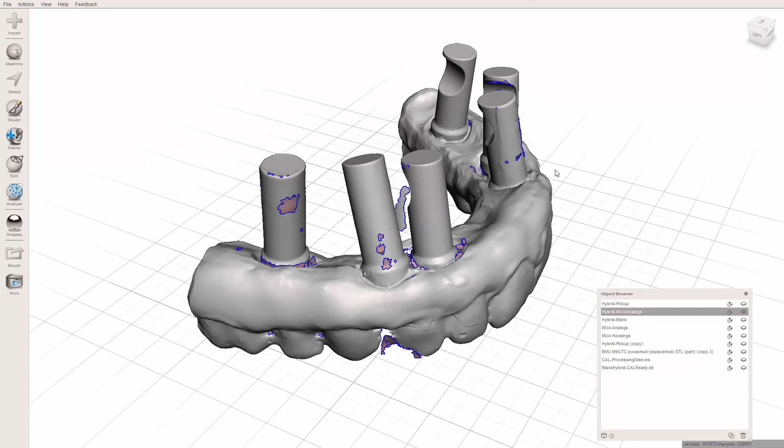Okay, so I've actually already finished creating this video on this technique, but I want to make a quick intro edit, because this whole set of two videos I'm making right now really are assuming we've got a hybrid that's already in the mouth, and now we've got to basically take an analog impression, or we've picked up our implants in the hybrid, and so then we've attached analogs and scanned that with these analogs sticking out.

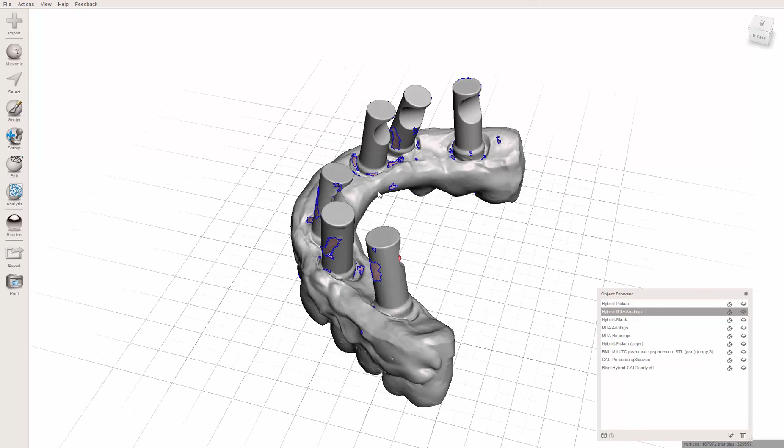But here's the thing, you might not always have that. You might not have a temp denture that you've done a pickup on. What if you're just uncovering this patient for the first time, and all you've got is some impressions of the patient ready to make a denture, or your hybrid, whatever it is, and you know you've got an edentulous arch.

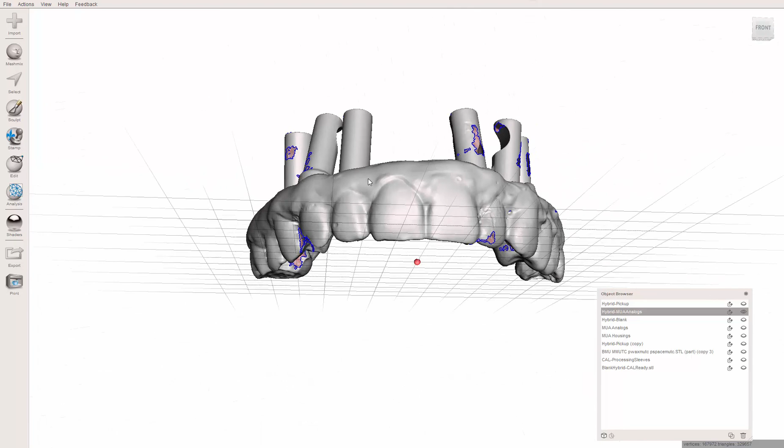But you also have to find out where these housings are. So in your same impression, you could think of this hybrid here. Just forget the fact that there's teeth and just assume this was actually just the impression. You have some other way of determining the VDO, the occlusion. You've already done that as part of your denture setup, but this right here is just an impression.

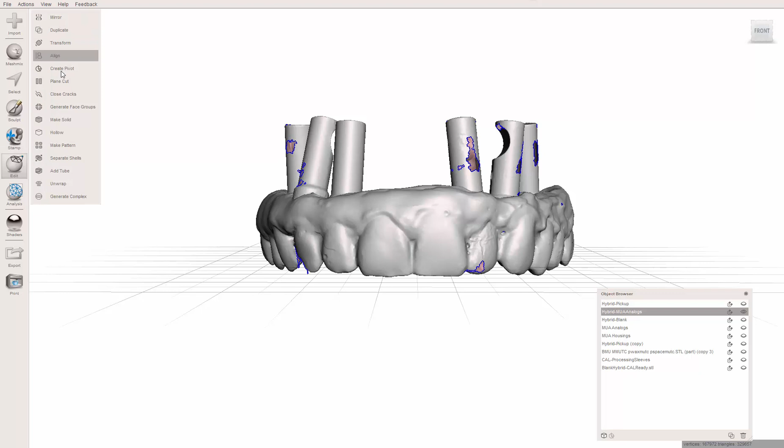So everything I show you in this video, it really doesn't matter that this part has teeth on it. It could just as easily be - let me try something - plane cut. This whole object could be cut just like that and have no teeth on it, no record. I'm not going to do it because it won't clean that up, it'll look ugly, it'll be dumb.

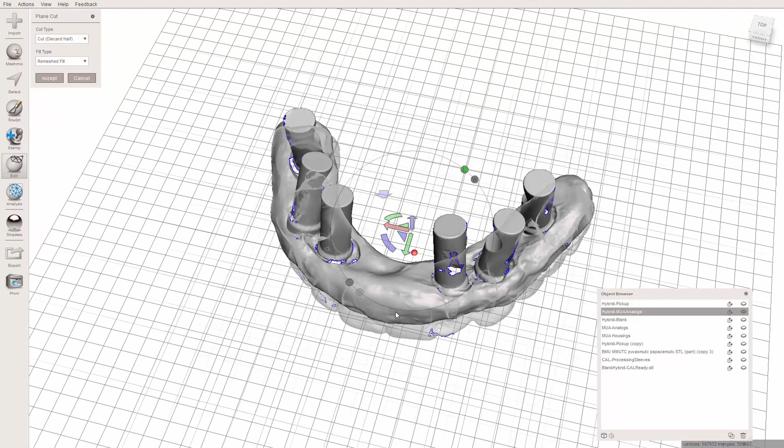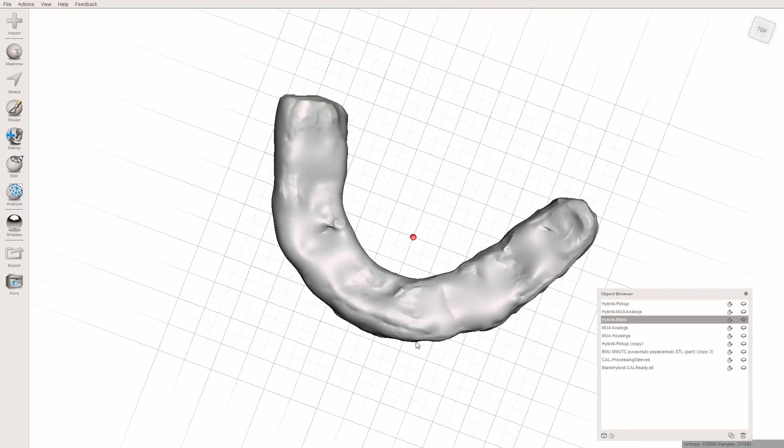But I think hopefully you get the point that the teeth do not play any role in this. They don't contribute at all to what we're doing here. The only thing I need is where these are, the bottom of this potentially, but really for this thing I just need these six pieces, these analogs sticking out, and then having this blank hybrid that I've created elsewhere, in some other software, whatever. As long as the two of them are lined up, that's why the tissue portion is important, just like any impression - really just the intaglio, the tissue portion, and the analog sticking out is the only thing that's important from this.

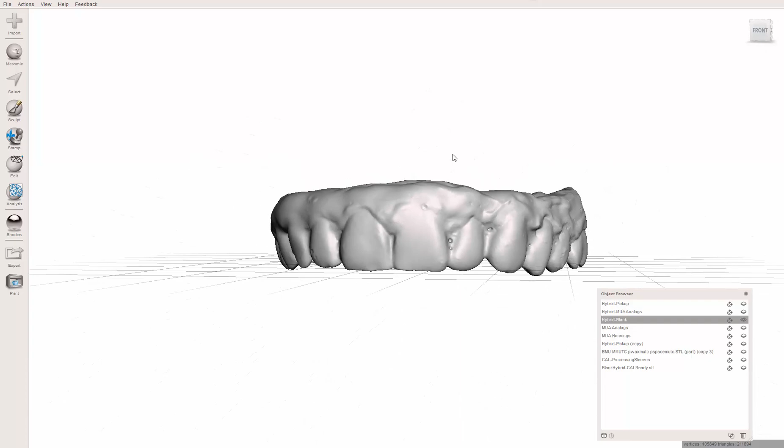So I can create my hybrid right here, we'll say in Blue Sky Plan, and then do the rest of what's shown in this video to make it so that it's got holes in it. So I'm going to stop there. I'm going to let the rest of the video explain that process so that the holes are precisely placed, and hopefully this introduction helps to provide a little more clarity to the subject. All right, thanks so much.

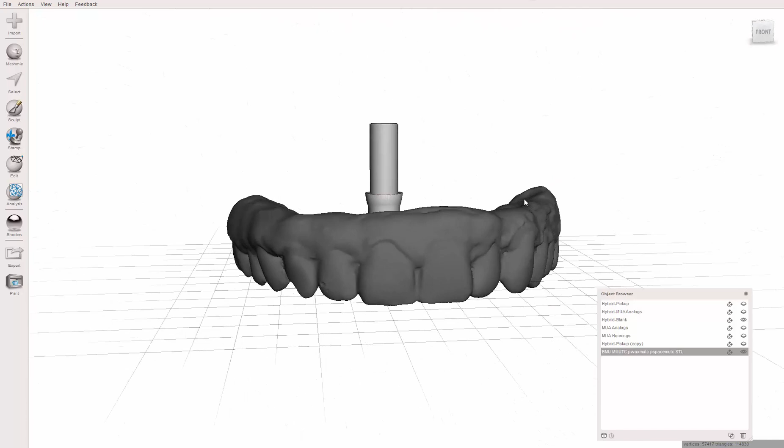Okay, so in this video I'm going to show you how to take this generic sort of denture thing that we've created here, and how we can digitally remove the holes that would be where our implants are, so that we can do what we call the Cal technique. So anyway, I've already done it in a previous video, with these analogs and then these more traditional housings, which you can still do with this approach.

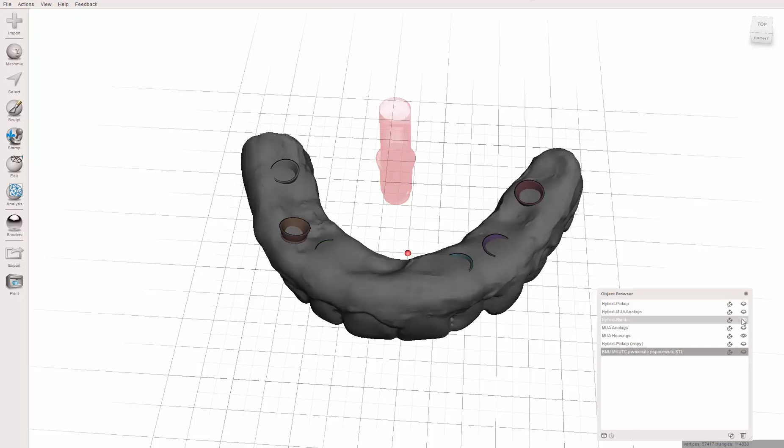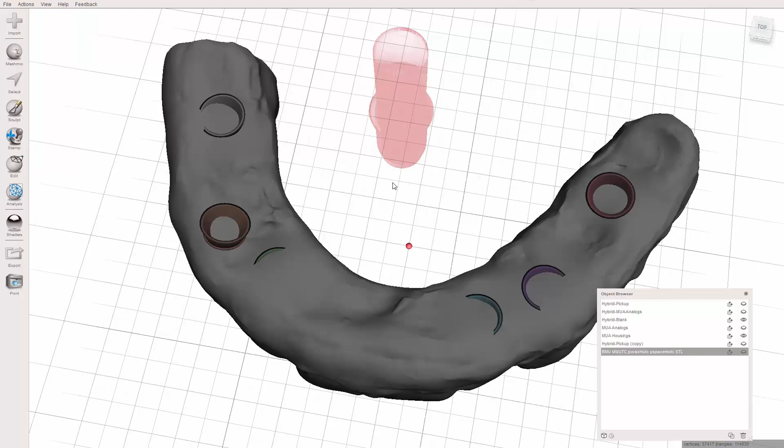But if you were to do a Boolean subtraction of these from it, they're going to be ribbed holes like this, so you're not able to slide anything in and out. Plus, there's no offset, so it wouldn't really work if you combined it and made those holes perfectly within this - your alignment has to be perfect. So the Cal technique gives us some wiggle room so that we can get a passive fit.

So anyway, let me show you how I would approach it if that was my goal. So let's hide these. First thing I'm going to do, I want to focus on how I would modify this object. So right now, in this current workflow, this outer shell would be basically built into your framework, or metal framework, or whatever.

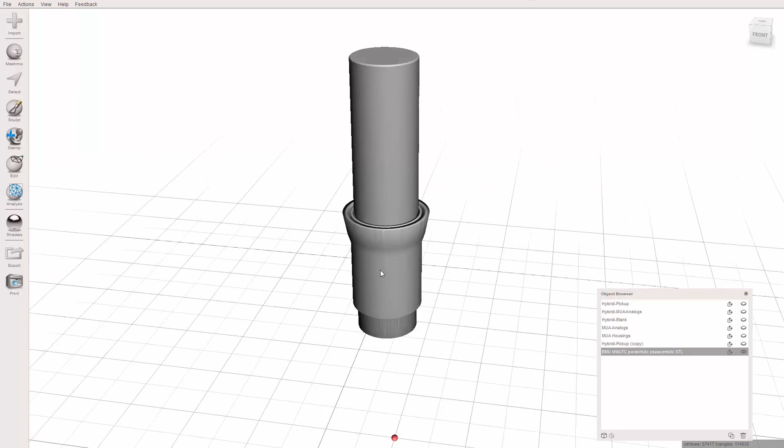Inside there's this little processing sleeve that just basically takes up space, and inside of that there's the actual same little Christmas tree looking housing. So effectively what I want is to make this outer shell part of my actual design, so I don't even need to worry about it.

What I'm going to do here is use the select button to double click on it, and I'm going to delete it. Don't need that, not at all.

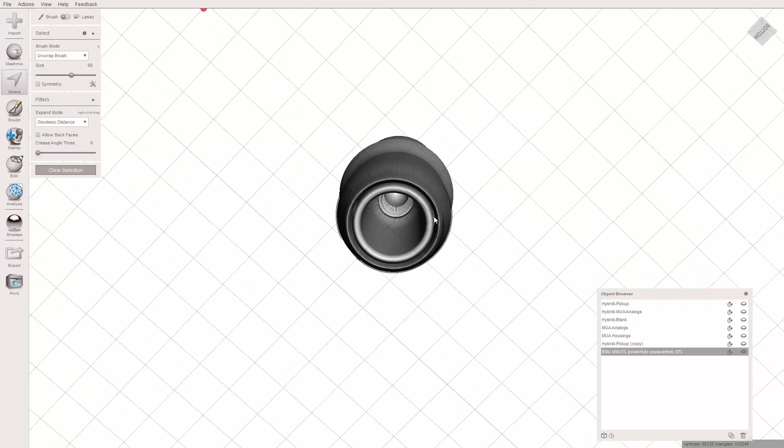So now I'm going to do something a little different here. I'm going to come right on top of this. It's a little bit going to be hard to see what I'm doing here. I'm going to make my selection tool a bit smaller so you can focus in on what I'm doing. I'm going to click right on the rim of this right here.

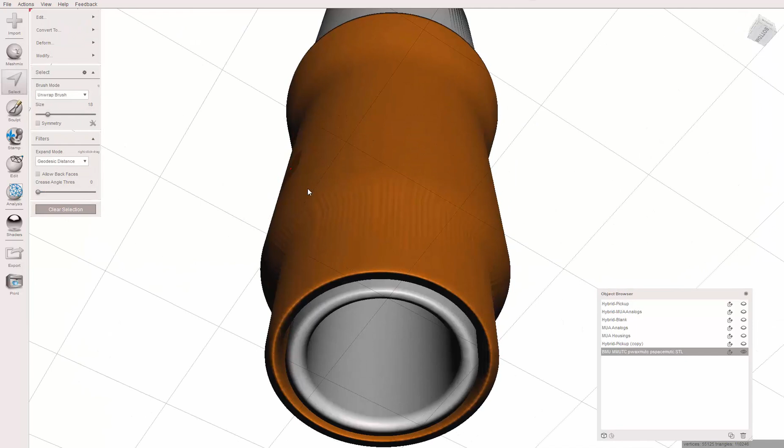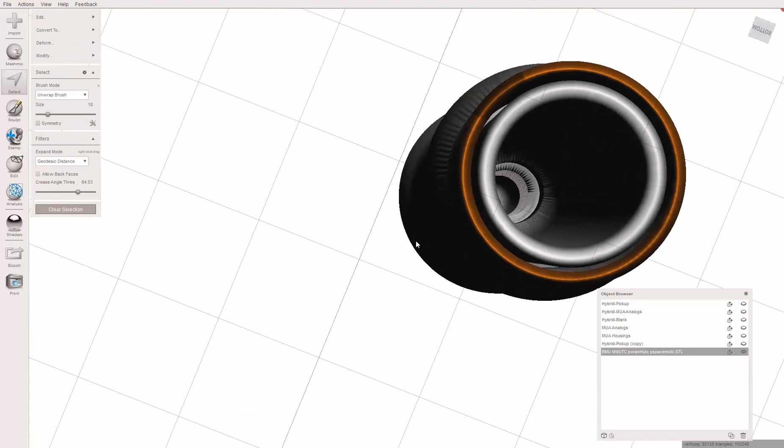I didn't mean to double click the whole thing. I am going to change the crease angle to be really thick, and trace right around. All I'm doing with the crease angle is making it so if my selection tool falls off at more than such an angle, it won't select, which means the inside and the outside aren't getting selected at all.

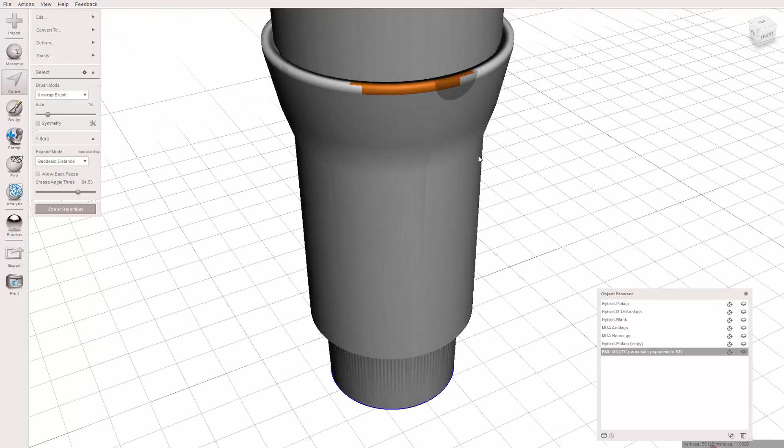So now you might wonder why I even bother doing that. Well, here's why. I'm going to hit the delete button, and do that one more time right up here. This wasn't actually part of my plan, but I think I'm going to go ahead and do that. A little bit tricky here.

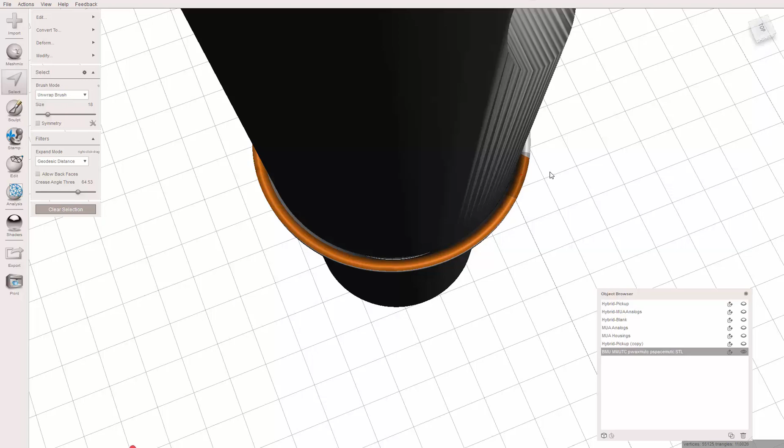All this work I'm doing right here will hopefully be automatically done within the Blue Sky Plan software for us. But if you think you're going to do this multiple times and want to have this on your own, do it one time, save the file, and you won't have to mess with this again. It'll be pre-completed for you. I know what I'm doing looks tedious, and I'm certainly not going to do it six times per case. One time ever, no big deal.

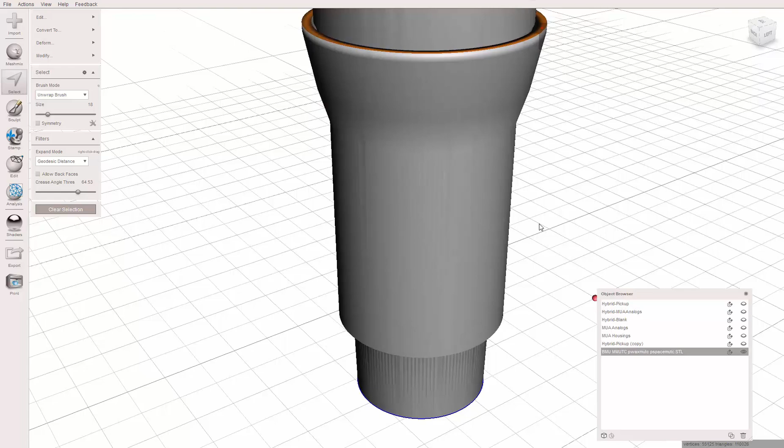Now hit delete. Now you see how there's this shell inside here. Oops. I'm going to highlight on that, double click, and delete.

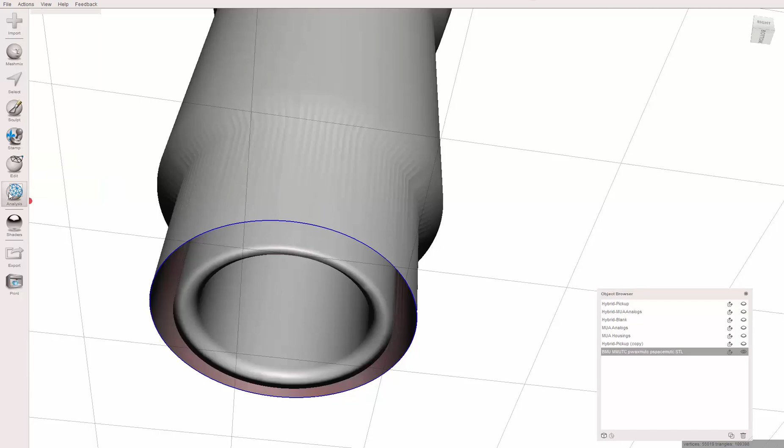So now I'm going to come up here to Analyze, Inspector, and there's a couple holes in this object. Oops, lost myself for a second there.

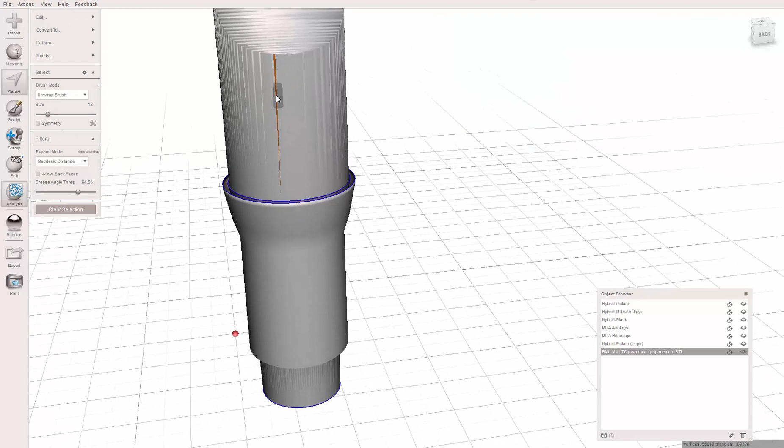Oh, it didn't delete everything. All right, so I'm going to go ahead and double click that, double click this, hit Y to separate those. I could have just done that in the beginning. Get rid of that.

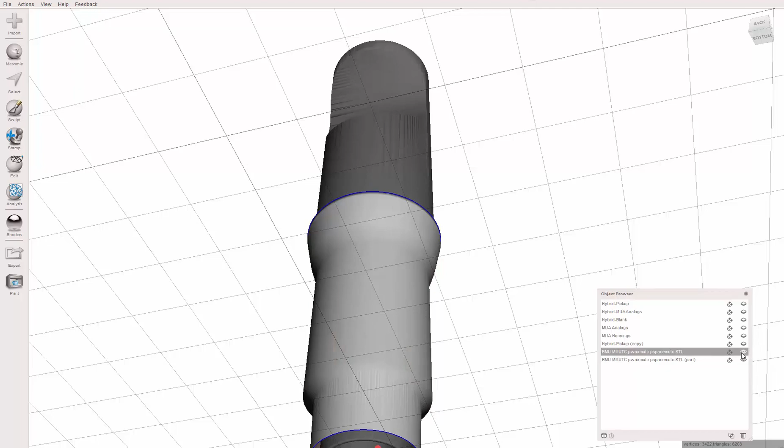So if you see what I've just left, I still have what I've previously used here. I just subtracted it from everything, so now all I've got is this housing. And I don't want anything on the inside here. Delete that.

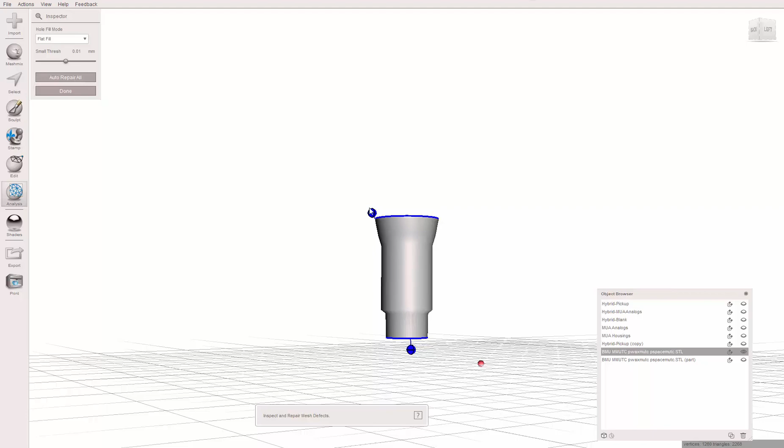Now everything's gone. Okay, so now what I can do is come and close this end off, and close this end off. And so this thing is going to travel anywhere this analog goes. This is going to travel with it. This is going to create my space.

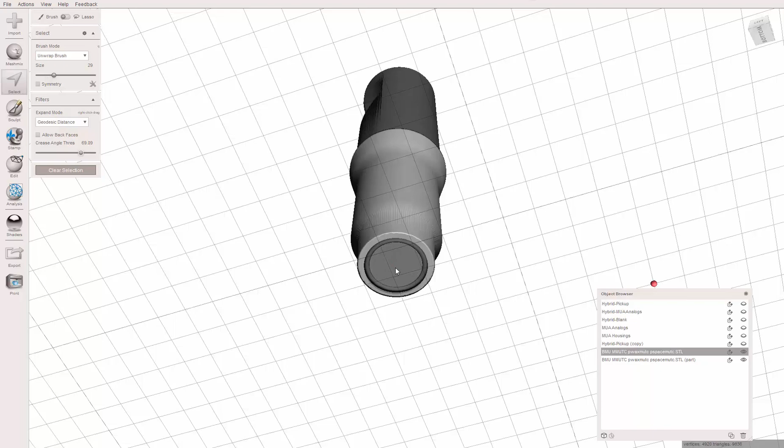Now here's one last thing I'm going to do. I'm going to go to the select tool. My crease angle is nice and high. I'm going to make this really big and select with only just one click, because now it selects everything on top here. I didn't click on this other thing - this is a separate object.

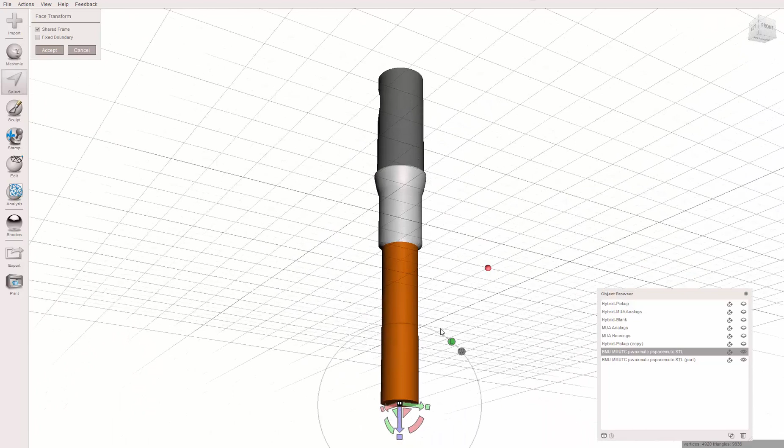And I'm going to click Transform, the T button, and just pull this way down, because this is going to make sure I have a screw hole to access these. Hit accept. Okay, so now here is my new analog hole thing.

Let's go ahead and reconnect these two things, combine them into one STL. And so now I can go about what I did in my previous video of aligning these, okay?

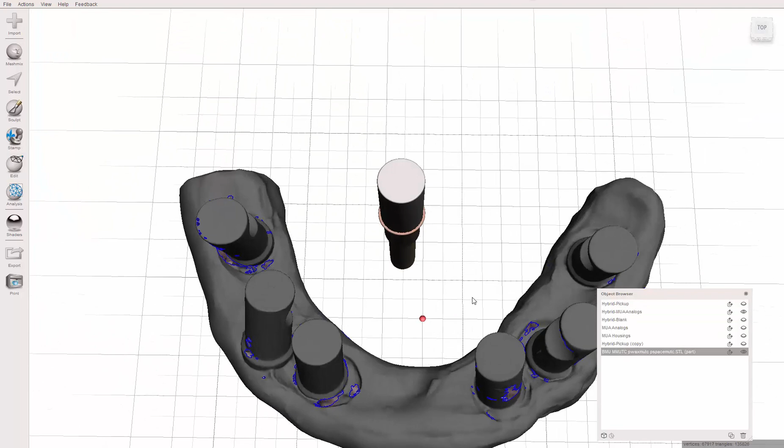So I'm going to go ahead, do one, and then pause the video and do the rest on my own. I'm going to press the N button, scribble a circle. Oops, I fell off the edge there. Do not do that. N.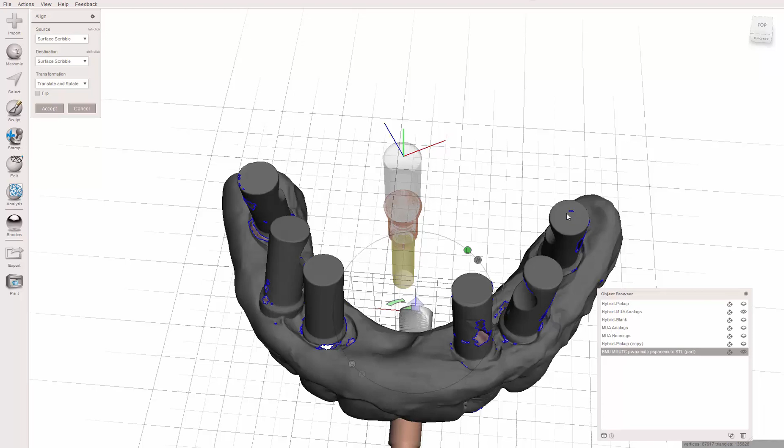Draw a circle, hold the Shift button, draw a circle. Flip it over, and line it up as close as you can. Doesn't have to be perfect - that's what the whole Cal technique is going to allow us to do. Hit accept. Okay, and I'm going to pause the video.

Alright, I have now finished. They are all lined up.

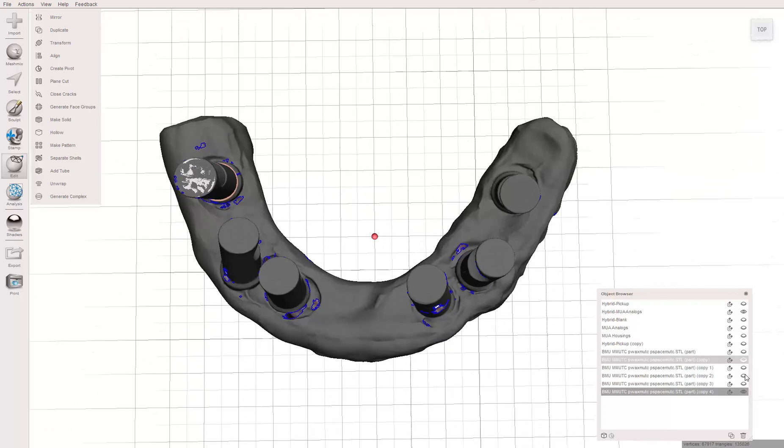Let's hide this, and you can see here they all are. Okay, so now we can go ahead and combine them all, because we don't want them to move, so there's no reason in having them separated. Click combine.

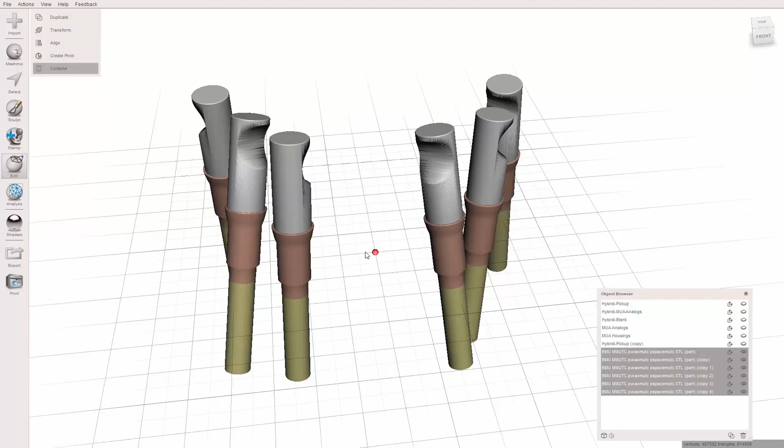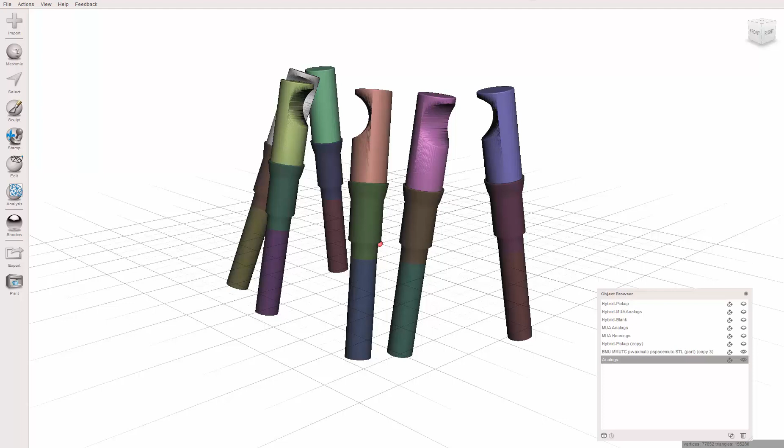And now we can go ahead and select, select, select. Hit Y. And so now we've got analog - I've got the same one up here, which is pretty much the same thing, but that's fine from my previous video. And so here's these housings.

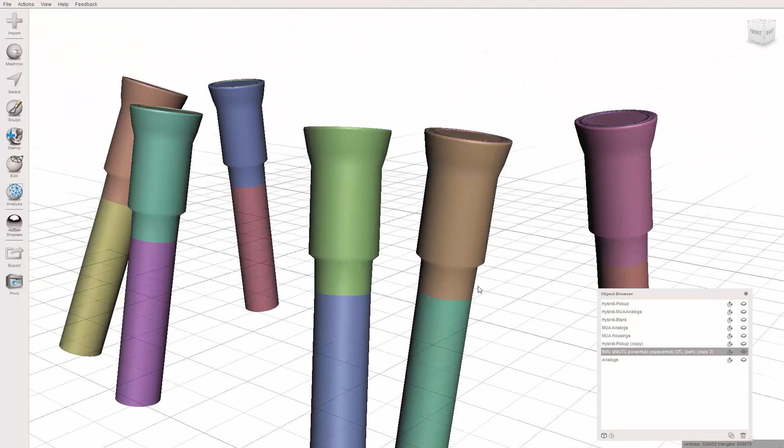Now, one thing I didn't do, I should have done, but I'm going to show you how to fix it anyways. You know what I'm going to do here? I'm going to undo that because the problem is I still have the actual housing contained within this. Not a big deal, but I really don't want those in there. So I'm going to hit Control Z, and now they're no longer disconnected.

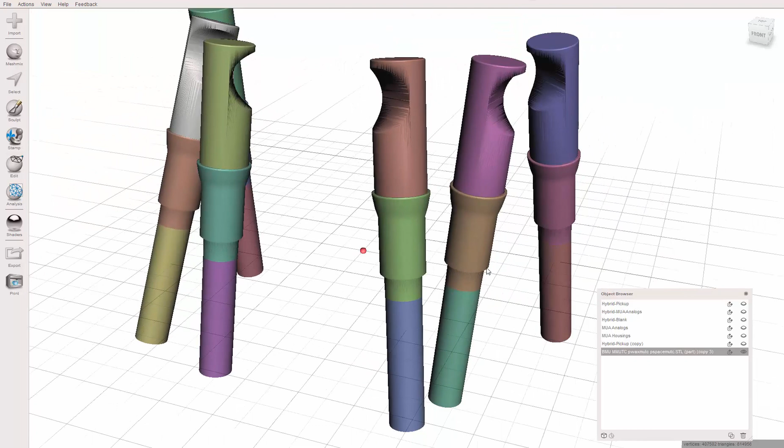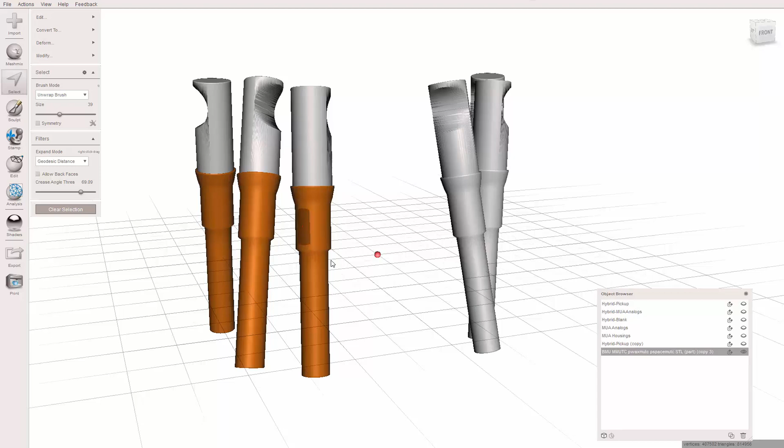I'm going to hit Control A because all these colors are going to make things a little hard for me. Control Shift G, and so now the colors are all gone. Why is this important? Well, because I can now select this part, because technically there's three components here. Here's the analog and housing inside of it, and then this outer processing sleeve that we created, or that was there but we modified, the spacer portion.

Okay, so I'm going to hit Y to separate those out instead. And now hide. And so now I've got these. So if you're, let's go ahead and, yeah. So, cal processing sleeves.

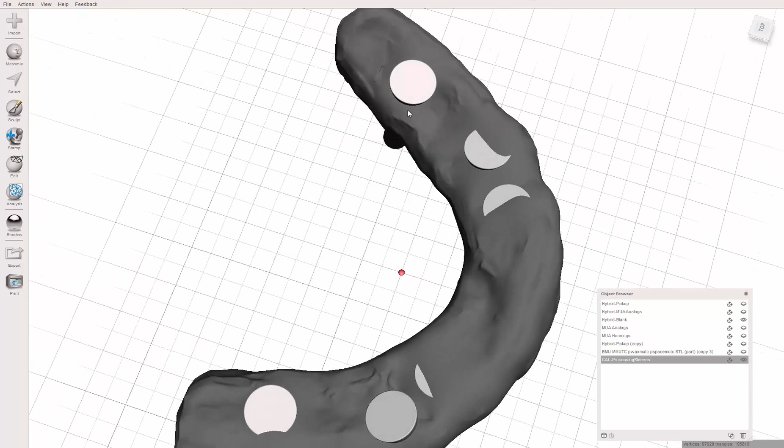So here's what I should have done. My oops - I should have extruded the bottom portion as well. Because when I turn on this blank hybrid, they don't perfectly stick out, which means my holes aren't quite all the way through. I could just Boolean subtract it and then take my hand piece and cut it out, whatever. But it would be best if I went ahead and took care of that to begin with. So I apologize, I'm going to show you how I would do that.

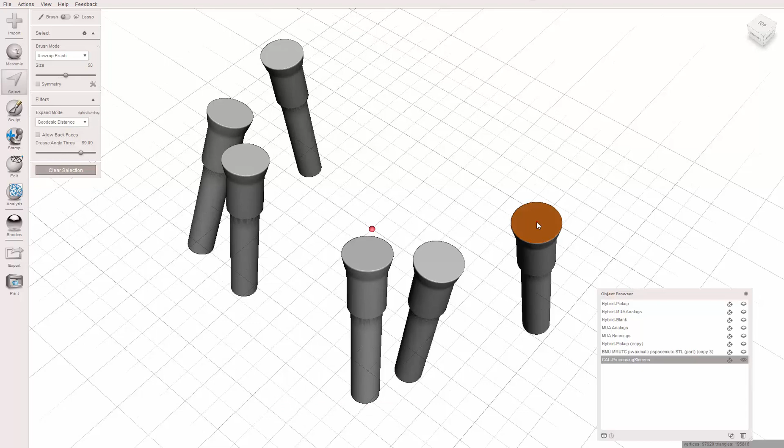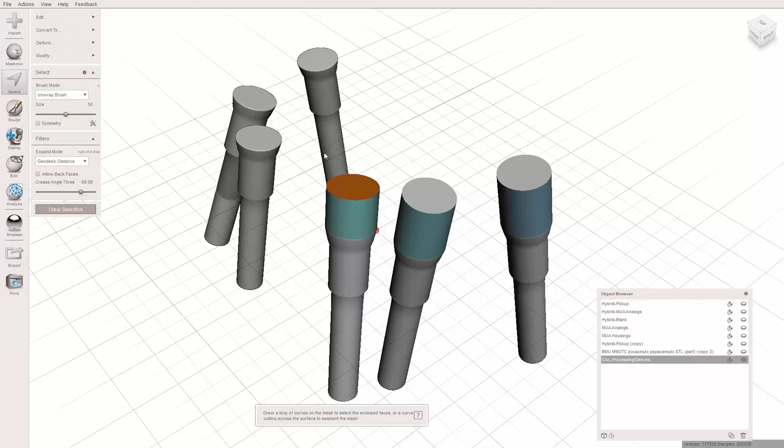I'm going to turn - my crease angle is already up. Select here, T. You have to do this one at a time, because if you try to do all of them at the same time, the distance at which the transform moves will be an average of all 6 of them. Hopefully that makes sense. And it doesn't take long to just do them real quick.

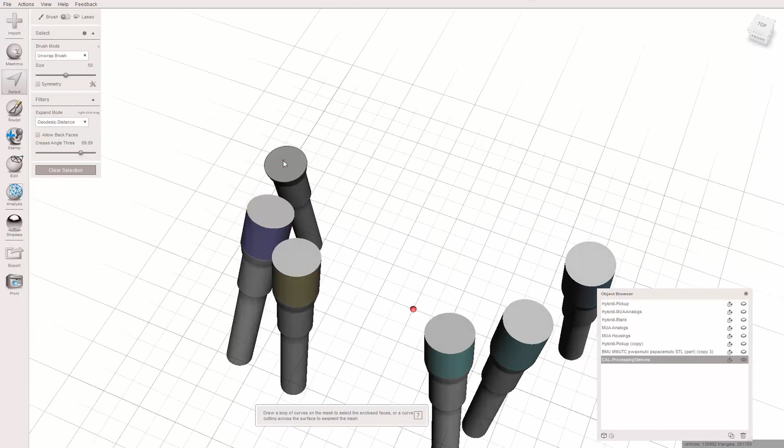But, like I said, had I done this at the beginning, it would have been faster. Could I re-record this video? I certainly could. Am I going to? No. This is me just thinking out loud and kind of showing you my thought process. If this is useful to you, awesome. If it's not, well, hopefully it was at least entertaining.

Probably not. Okay, so now these are nice and extruded. I can bring in my hybrid blank, and so now I could do a Boolean subtraction, and I'm going to end up with holes that I can drop my sleeves right into. So I'm going to pause for just a second. Okay, sorry, I had to check on something.

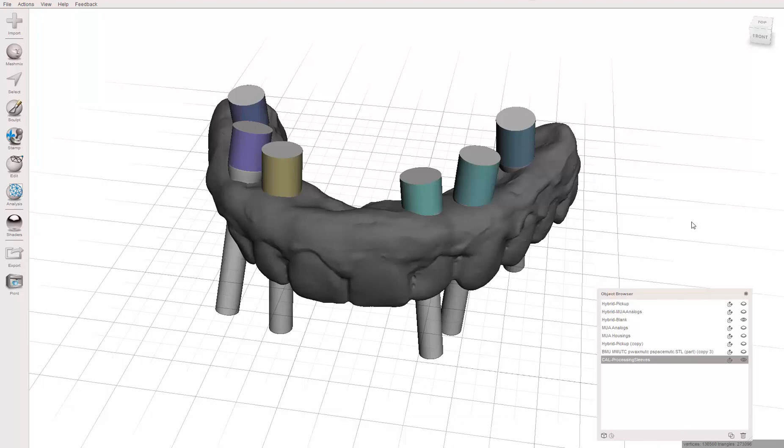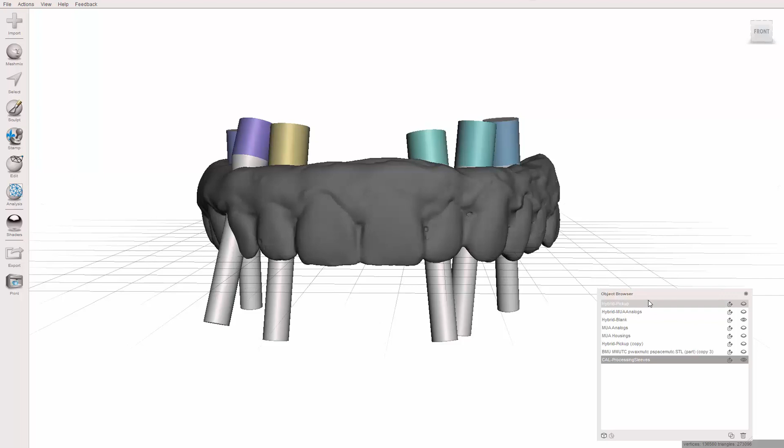Now, here's one of the tricks that I've started using more and more, and the Boolean subtraction you can do in Meshmixer, but those of us that have tried know that it can be really frustrating, and it can take a while. So anymore, this amount of calculation I probably wouldn't do in Meshmixer. Instead, I would come over here and I would extract each of these, or export both of these, and open them up in 3D Builder. So I will go ahead and export them, and then I'll pick up in just a minute. And I'm going to pause for now.

Basically I just created a folder so I wouldn't have to mess with hiding anything. So I'm going to export, we're going to say the blank denture. You may already have the file saved somewhere, but if you've moved it at all in Meshmixer, make sure you resave it. If not, don't worry. But I'm going to pretend I have.

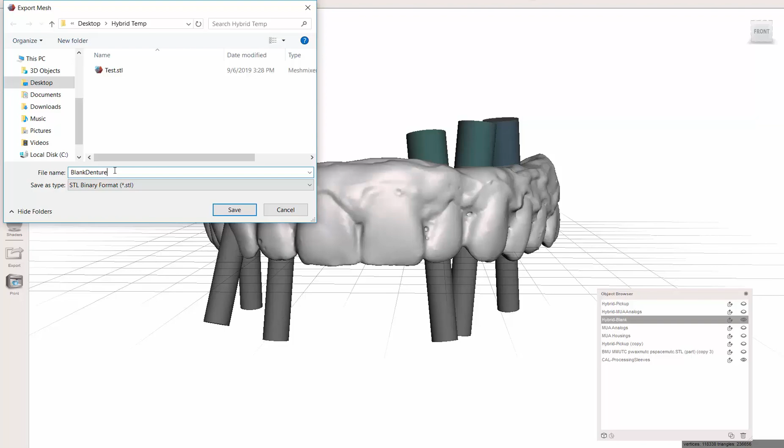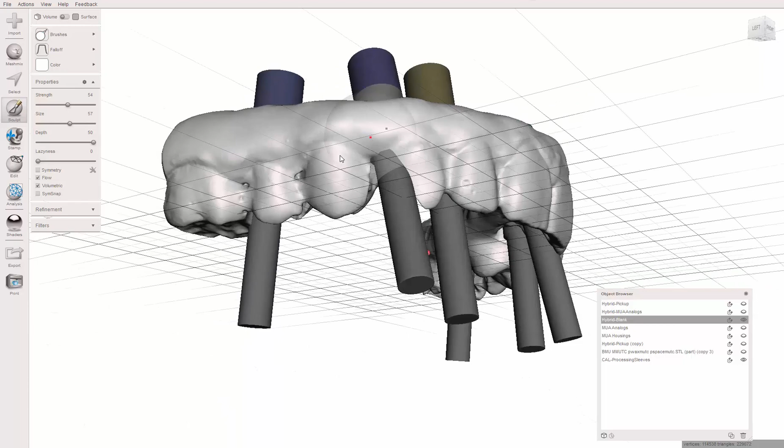Before I do that, notice that in here you could be looking and think, oh boy, this looks like it's going to be super thin right here. You might notice that and think, okay, I want to reinforce that. So I'm going to come to Sculpt, grab my brushes, grab the drag, make this area really big with the bracket buttons, and sort of drag it out and thicken it up a little bit. I'm not saying you have to do that, but it's an opportunity to modify your design if you think it was well designed but honestly not going to be strong enough. Let's go ahead and bring it out here.

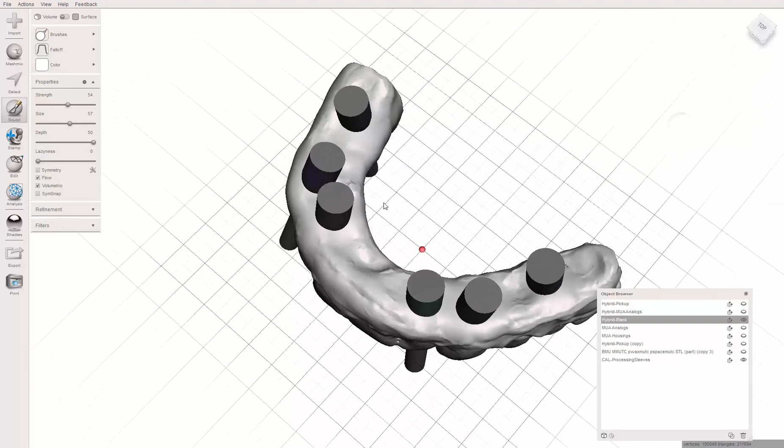Now, this is all assuming this already fits. You can do the Boolean subtraction from the model as well if it didn't fit, but honestly, if you designed it in Blue Sky Plan or whatnot, it's already meant to fit the tissue. We just need to make it fit the housings. So that's it, just a little bit of adjustment there.

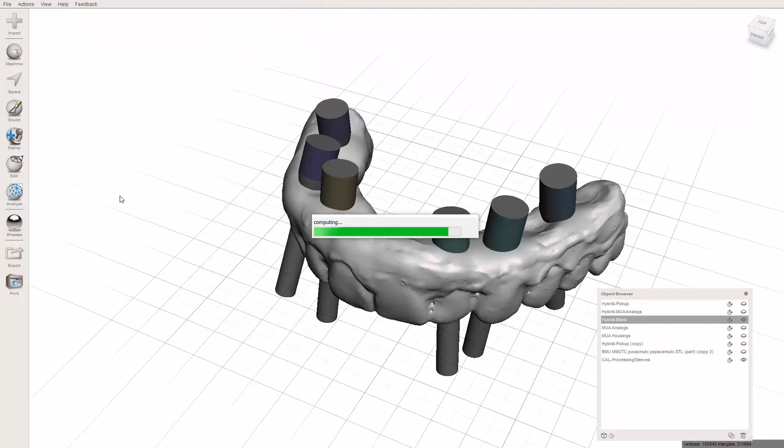Now I'm going to export. I'm going to call this the blank hybrid. And call this the cal cylinders.

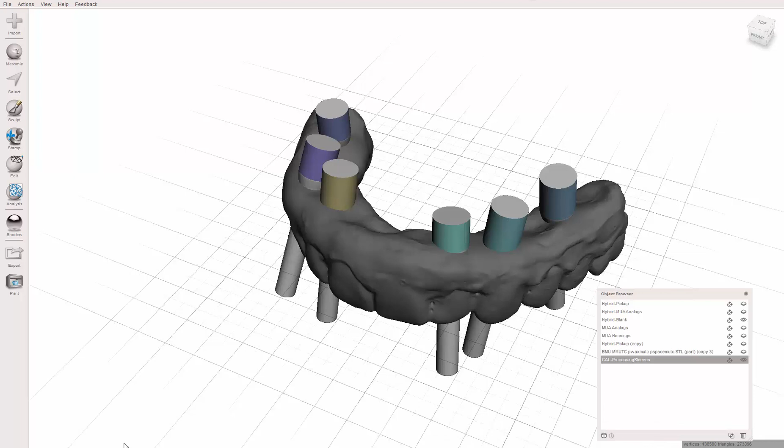Just a second, I'm going to pause and unpause. So I've got this folder right here. I'm going to open up 3D Builder and ask for just a new scene.

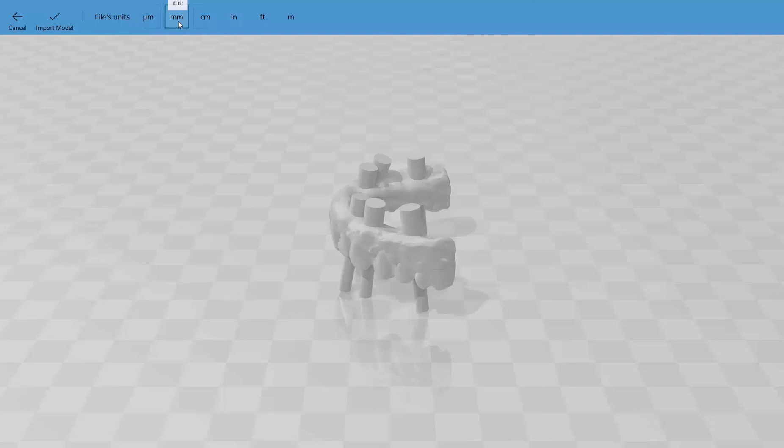Now I'm going to take both of these objects. You have to do them both at the same time. I'm going to drag and drop them, and it will load them. We need to tell them what units - make sure you process this properly, otherwise it will screw you up later. So we're in millimeters, that's everything we've done so far is in millimeters. It's in dentistry, it's going to be millimeters. And click Import Models.

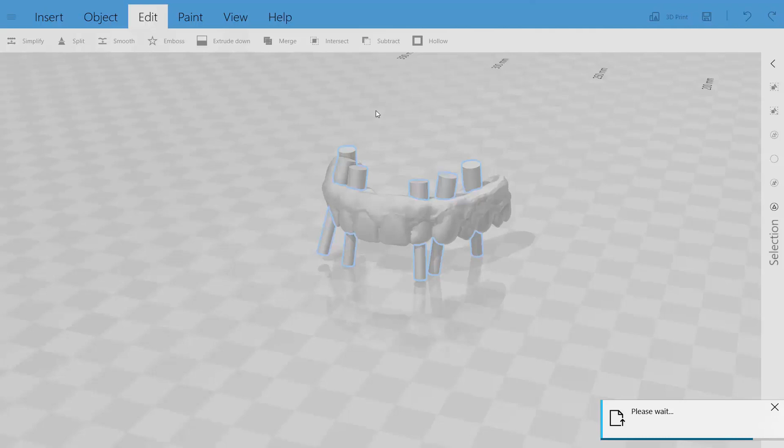Now all we have to do is click on these, just these. You notice if they're highlighted, but the denture itself is not highlighted, just the outline of these, and we're going to click Subtract. And there you have it - you now have your Boolean subtracted object.

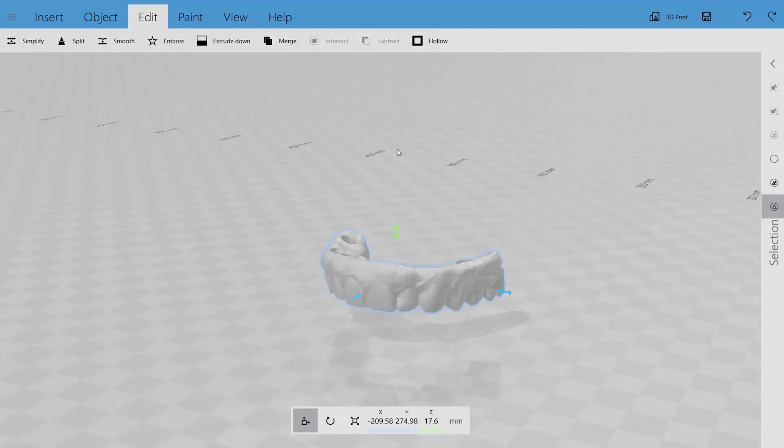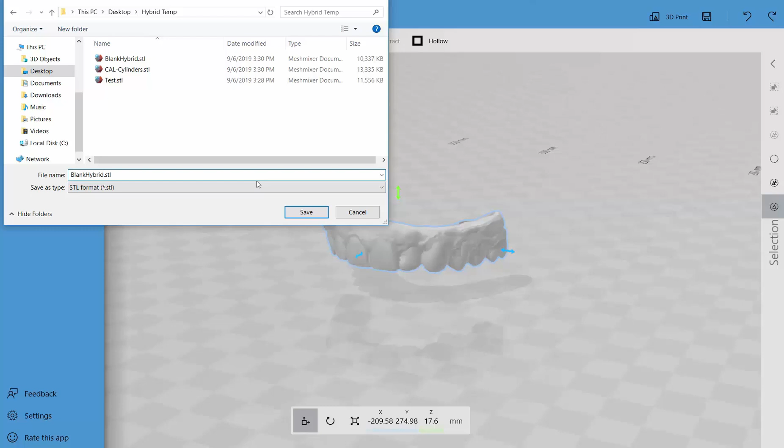Now we can come here, hit Save As, make sure that we have STL file format, call it BlankHybrid, and hit save.

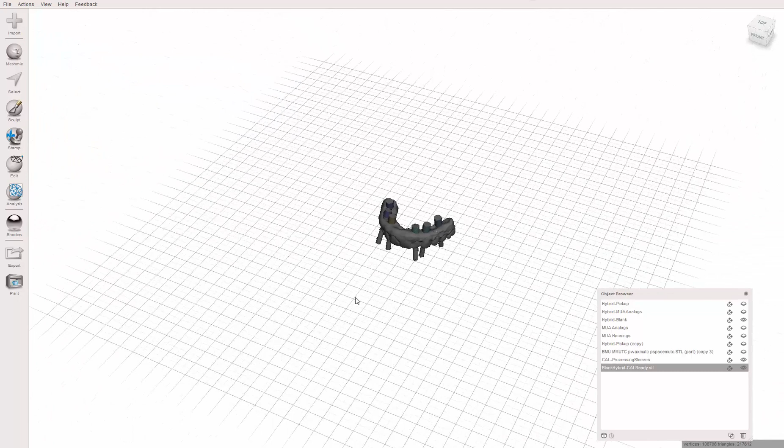So here's one issue I have with Meshmixer, and there may be a way around this - I just haven't messed around with it to know. The problem is if I now bring this into Blue Sky Plan, it's not going to be in the right place. No, and so you'll see - I don't know where, there it is. It's way over here. So I don't know yet how to preserve the coordinates. There may be a way. If anyone wants to let me know, I would really appreciate that.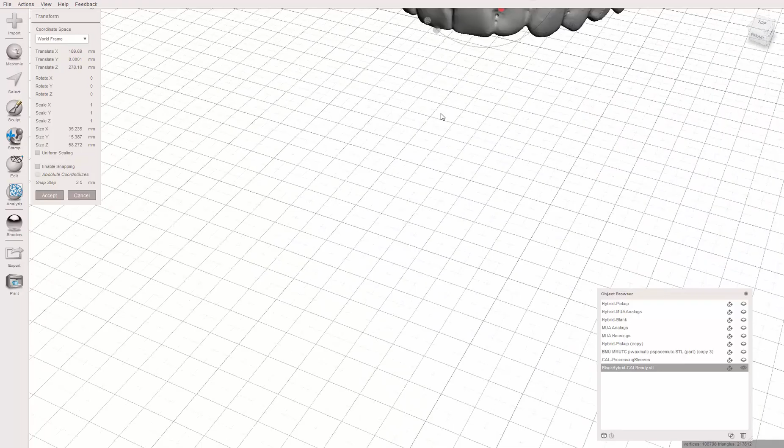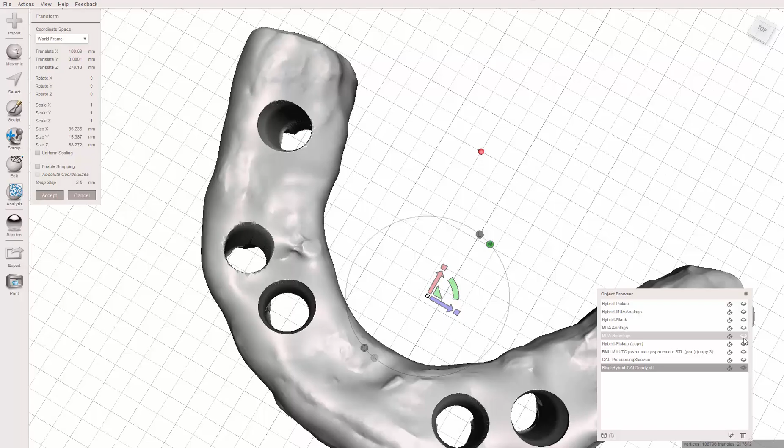You could go in and realign them using Blue Sky Plan or something else, but hopefully you've waited till the very end to do this, and now you have something you could print or mill, ideally print, because we're talking about a cost saving. Well, I guess not ideally print - you could mill this and have a really nice final material, and you can go ahead and basically take your little sleeves, your multi-unit abutment, these housings, coat them in cement, drop them in there so they're loose fitting, insert it in the patient's mouth, screw them down, cure it, and now you've got a totally passive fit.

These were just, they'll fit just loose in there. So yeah, you can see - obviously the path of draw, you couldn't just slide it over top, but you can pre-insert them. See how close I can get this alignment. Again, it exports however it wants, and it rotates it and does all sorts of funky things. But anyway, there you go.

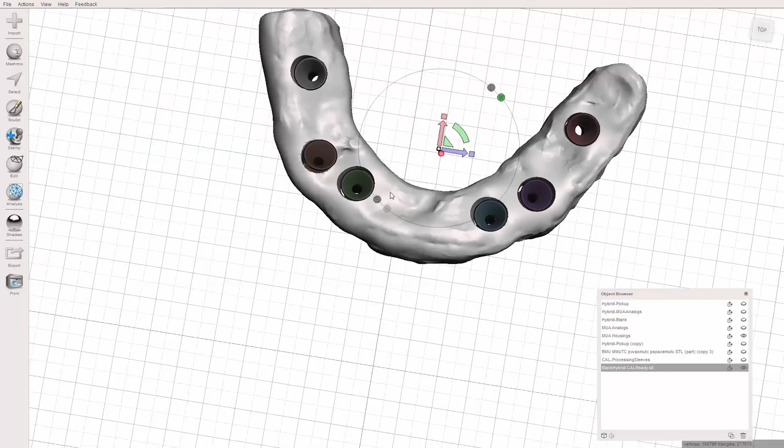There's your Cal Technique processing approach that you could be using following this video.